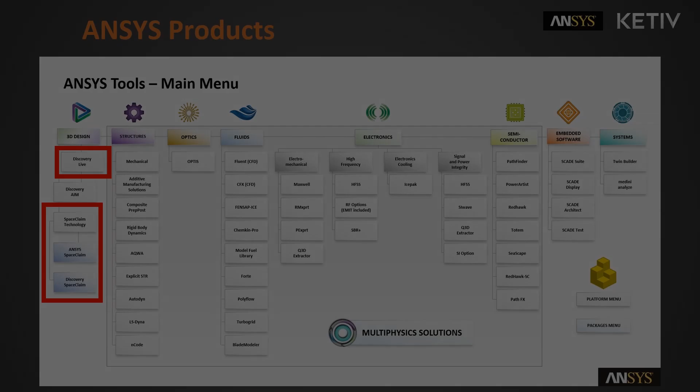So for today, we're going to be going over Discovery Live, but we just wanted to show you a preview of the Ansys products that we offer. You can see that Ansys can simulate different types of multi-physics: structures, optics, fluids, electronics, semiconductors. In the red box, you can see that's the only part of the software packages we'll be going over today. But there's a lot more to Ansys, and if you're interested, please contact us after the webinar.

And we're willing to offer those demos 7 a.m. to 7 p.m., 7 days a week, right? I don't think so. I don't think that was in our contract when we negotiated. All right, well, pretty much all the time, Monday through Friday.

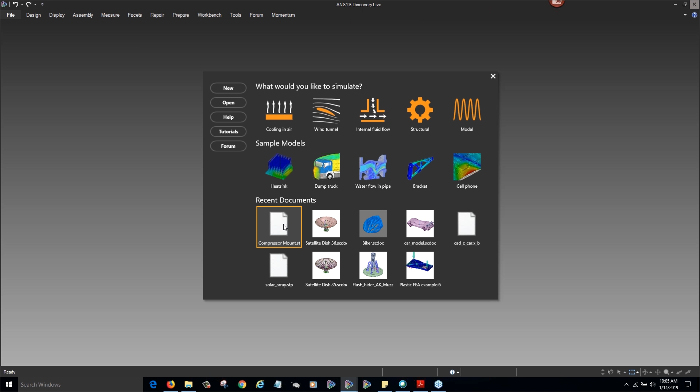So if you have a tool already where you could create your own geometry, or where the geometry is already created, great. If not, you can also use Discovery's SpaceClaim engine to do the design. And that's what I wanted to show you today.

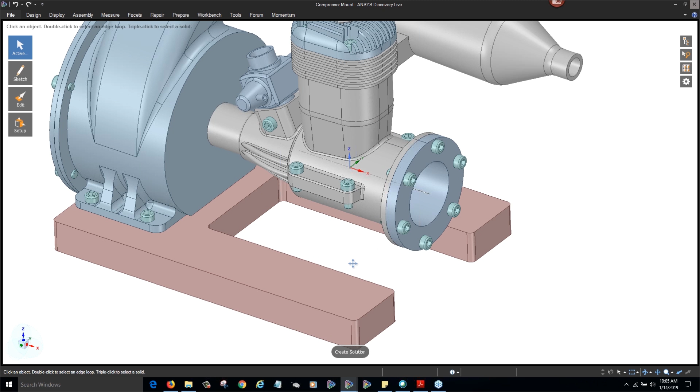So what I have here is just a simple little compressor, sitting on a little bracket there. And I'm a design engineer, and one of the things I notice is that there's a lot of vibration with this motor, and it's causing a lot of stress in this area. One of the things I wanted to do was see if I could come up with some sort of mount design that would help support it and reduce some of that stress, and also let it vibrate to a certain extent, without damaging the other structural components.

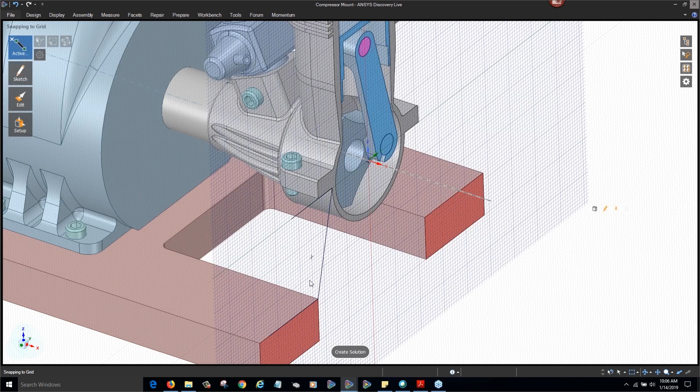So let me just jump right into it. I'm going to go ahead and start designing something. The cool thing about Discovery is that you don't necessarily have to have a completed design here. What if you just wanted to compare a couple different ideas that you had and narrow them down to maybe one or two, and then move on to some detailed design? You just wanted to maybe have something.

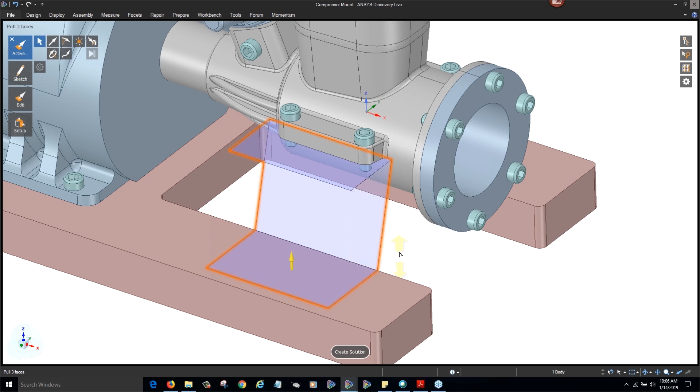Testing, hello. Yeah, you just wanted to mock something up, have something designed, maybe just to communicate it with somebody on your team. Hey, what do you guys think about a design that looks something like this, for example? So here, what I've done is just started with a very simple design here, and my goal is to have the software guide me through what additional improvements I can make to maximize the performance of this bracket. So I've pretty much done a simple sketch, turned this into 3D, and below it has an icon that says Create Solution.

So it's really easy to even go from design to simulation here, just in the same interface. I can come in here and choose between, for example, thermal, fluids, structural, modal. And then as soon as I pick one of those, there's all different types of materials I can choose, or I can add my own.

And then I could select entire assemblies, or select only individual sub-assemblies or individual parts. It's up to me, depends on what I want to simulate. So here, what I'm going to just do is choose the bracket.

I'm going to apply some boundary conditions, like underneath this bracket is where maybe it might be mounted or glued or fixed somehow, so I'm just going to say that it's fixed. When I click on a face, there's a lot of different boundary conditions I can set: forces, pressures, moments, displacements, things like that. So I'm going to say fix support here.

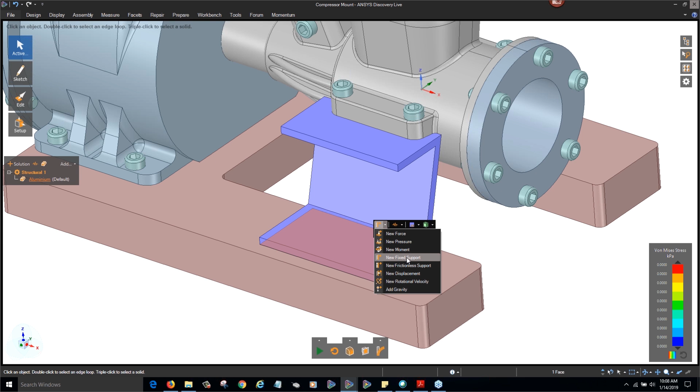And then on this face here, maybe what I'm going to do is apply a force, or maybe even a moment. I think a moment might be one of the things I want to look at first. You can look at multiple things, and have multiple solutions in this same environment. So I'm going to say maybe a -10 Newton meter moment, that way it's rotating in the other direction there.

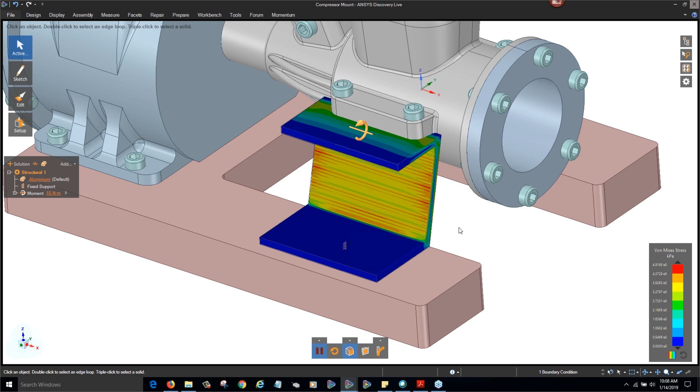As soon as I give it enough information, in this case a fixture and a moment, it immediately starts displaying the results on the simulation.

So if you're a designer and you've always wanted to be able to simulate but have heard it's very difficult, this is a great tool, because this actually makes it very simple for you to do some quick simulations and help validate your designs.

If you're a simulation expert and maybe you also want the ability to experiment with a couple different ideas before you move forward, and you're traditionally used to having a mesher that takes a long time to get results, so experimenting with a bunch of different ideas is not practical, this is a great tool for you too, because this allows you to have all of those very quickly.

I can already see where my stresses are just visually on the model. If I look to the right, there's a legend, showing me the color profile, and it's also displaying that I'm looking at the von Mises stress profile here. Let me introduce you to a little bit of the interface here, and then we'll start really transforming this bracket.

Over here to the left is my solution tree. This is what's going to list my boundary conditions and such. So structural 1, my material is aluminum, I can always change that from here. I've got fixed support, got moment defined there.

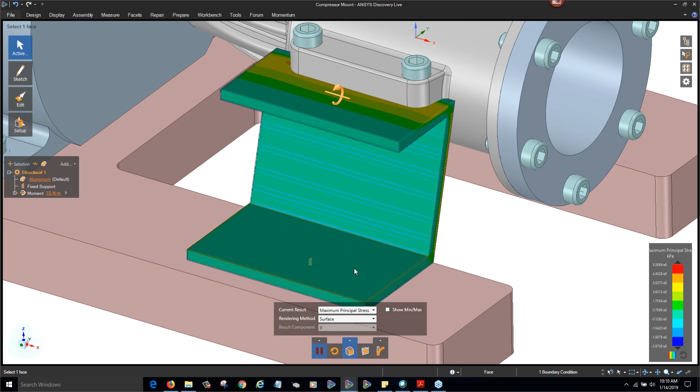Down below here, I've got the ability to pause and play. I can also change the results - right now we're looking at von Mises. If I want to look at deformation, I can easily toggle between those. Normal stresses, shear stresses, for example, very easy to toggle and take a quick look while you're making edits. I'll leave it on von Mises for now.

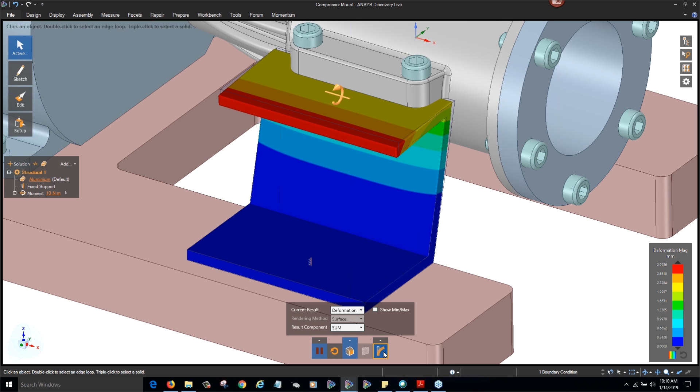And then, one last thing I want to show you is that we can animate the deformation. Sometimes that helps to see an exaggeration of the deformation, so you can get a better idea of how this tool might deform. So enough with that, let me go ahead and start thinking of different ideas.

Actually, before I do that, I figured what would really help me is, besides just looking at colors and the legend, is to actually have some graphs. So I can turn on some graphs, like for example max stress, max deformation, total volume. So as I'm editing the model, I want to instantly see, did that impact help or make it worse? Was it efficient or inefficient? The change that I made, did it add more weight to the actual part?

Is it going to be based on the material that I'm going to use? Is it going to cost too much to make? Do I need to now do some light weighting and things like that? So I'm just going to display these graphs here.

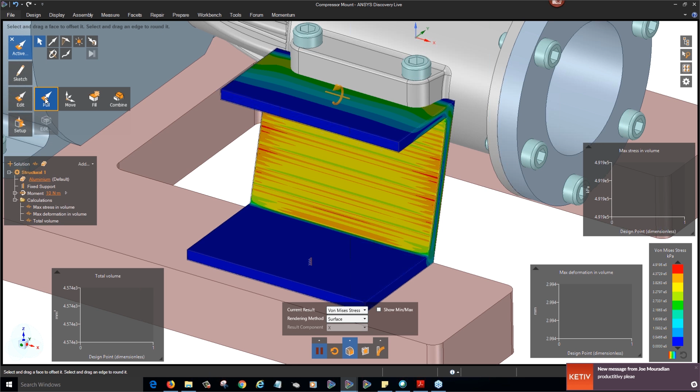And as I start editing the model, we'll take a look and see what displays there. So I'll start with our first easy to use tool, and maybe some of the ideas might be something simple like, can I just add some fillets in here? Will that reduce the deformation or stress to an allowable amount, for example?

So here I went ahead and added fillets, and we'll go ahead and see that display here in just a moment. If you look at my graphs here, it instantly updated that. So you have design point 1, which is before the fillets, design point 2, which is after, and you can kind of see that display.

If I want to change ideas, maybe what I want to do is try doing a chamfer instead of a fillet. How does that affect the overall part there and the performance? So chamfer looks like it has a little bit higher stress than the fillet, and I suspect that's because of the sharp corners, but it's also managing the deformation well, and obviously I'm increasing the volume.

So this is the kind of stuff that I may be interested in early on, without investing too much time in some heavy validation simulation, which is going to take hours just to report back whether something like this is going to be beneficial or not.

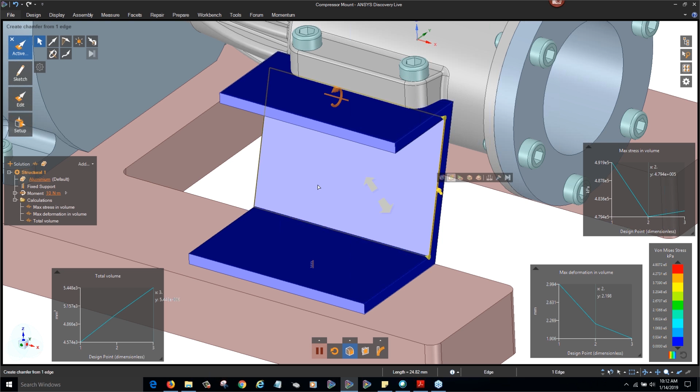Let me go ahead and remove these and then just go in a different direction. Maybe what I want to do is take a look at whether adding ribs would help here. So I'll use the same tool that I use to turn this sketch into a surface and turn it into 3D. I'm using it to copy edges.

It's called the pull tool, so really easy to use. If you have another primary CAD tool that you use and you have the feeling that if you want to use a different tool, it's going to take a long time to learn, because of learning where all the buttons are and where all these things are located, with one tool called pull, I can do a lot of different things, helping minimize that learning curve.

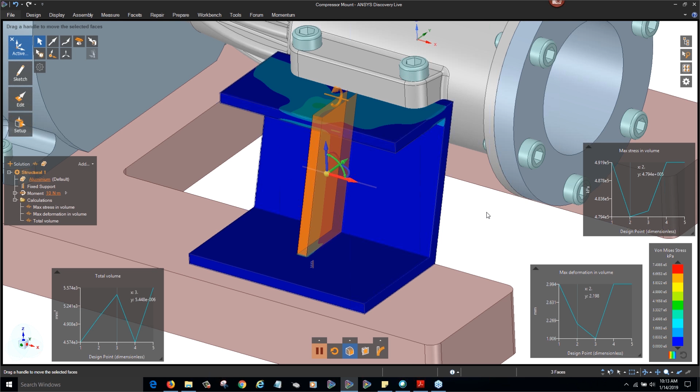So I've got the ribs selected. Actually, I'll probably leave it right there in the center, and again, just kind of animate deformation and learn a little bit more about how that rib is impacting the performance of this.

So the rib looks to be like it's supporting that center part. I see a little bit of deformation on the sides, but if you look at the graphs, it's really telling here, right? Deformation is really improving, but it's still not handling the stress well.

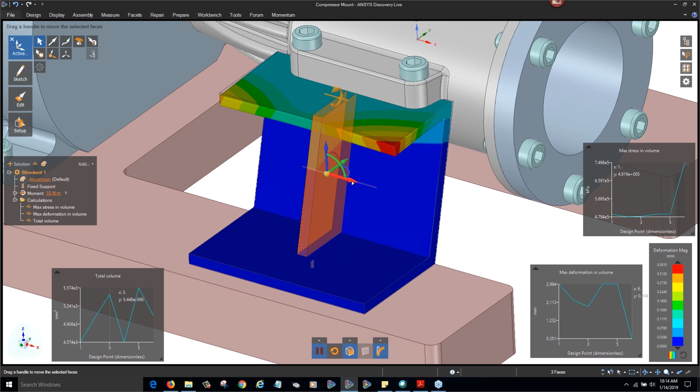So maybe what I need to do is just think about adding more of these ribs. If it's kind of helping out in one area, maybe I could add more to this. So let me go ahead and move this one to the left. That's the cool thing too, is I started with it in the center, but I want to move it. I can just use a simple tool called move to move it.

If you think about also traditionally today, you probably have to go back into some sort of a sketch environment, edit that initial sketch, reposition where it's located, have the model update. There's a lot more steps involved, whereas here it's something that looks to be like a lot of steps are compacted.

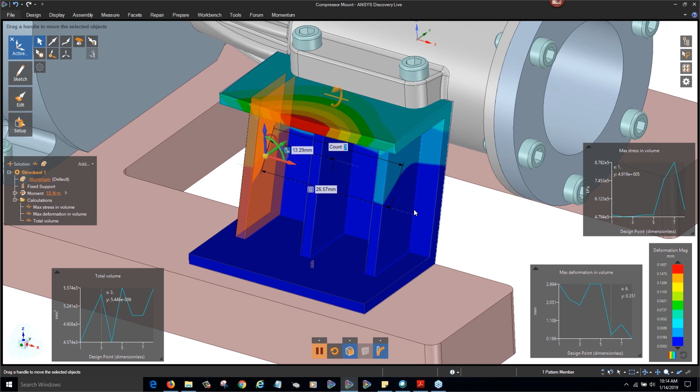So here I went ahead and patterned the ribs using, again, the move tool. Very easy to do. I've got a count of 3. And again, I'm taking a look at, while everything's turned on, the simulation's running, the deformation is animating, and I'm starting to see that maybe this rib design is really going to be something that I want to focus on.

So simply adding fillets or chamfers isn't going to be enough, and maybe a combination of both. Maybe after I put these ribs in, I'll come back and add some fillets or chamfers to the inside to help out. So that's just a quick setup there.

But what if I'm thinking, what do I do? 2 ribs, 3 ribs, 4? Which is going to be better? How thick do these ribs have to be? So the cool thing about this also is I can incorporate parameterization.

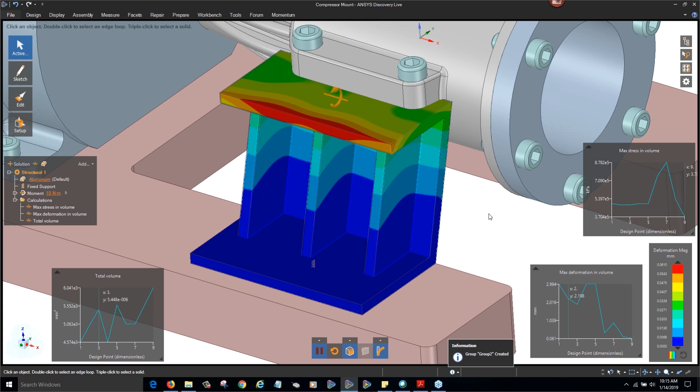So I can have the tool help and guide me quickly, kind of bounce through all of those scenarios and help me make that decision a lot quicker.

So let me go ahead and just see if I could parameterize here the thickness of this rib. Let's go ahead and place it on the backside here. Let's go ahead and parameterize that.

Okay, cool. So now over here back in the solution tree, I've got the ability to add a parameter study. Okay, so let's see how that's done.

We're going to go ahead and bring up those driving dimensions that I created. Like, for example, the count right now, I didn't really customize the name, so I just left it at the default name, group 2. But we'll start with 3 ribs. Maybe we'll go to 5 ribs, and we want it to be done in, let's say, 4 steps or so. So we'll go ahead and add that.

And then we'll also maybe look at the thickness of the rib. Maybe we want to go from like a 1.5 to maybe a 3, and we want to do that in maybe 4 steps. So I'll go ahead and add those scenarios.

What if I want to do all permutations? What if I want to mix and match some of these things? I can also do that. And you can see I'm going to quickly run through 16 design points here, in a fairly rapid amount of time. It's going to display all these values for me and help me quickly see that.

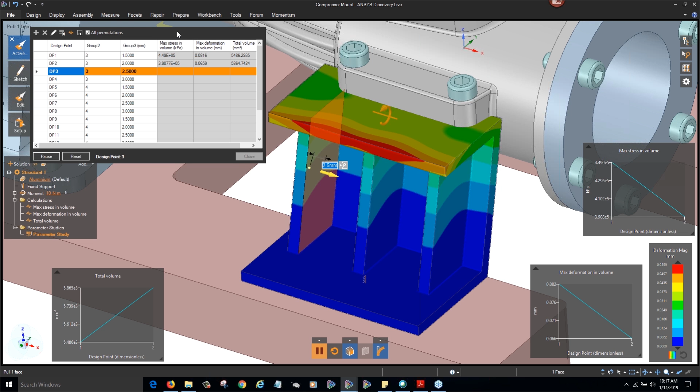So let's go ahead and start that. And I love that it's also going to update the model in real time right in front of me. It's just really impactful as a design engineer, somebody who's maybe not a simulation expert, but just wants to improve their design ahead of time prior to sending it downstream to either a simulation expert or to do that final validation and testing in a more mesh-based simulation tool.

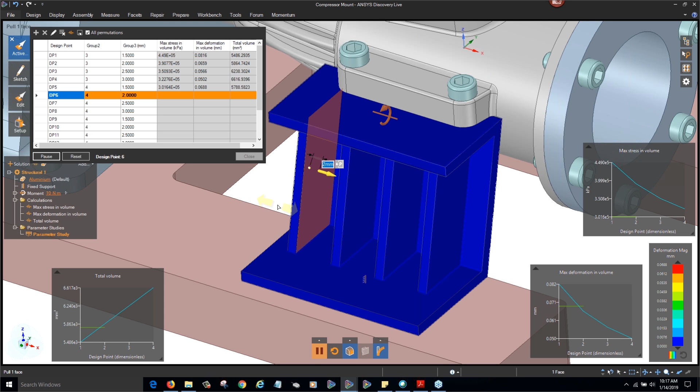So here you can see as these things are kind of going along, the values are being populated, geometry is being updated, and we'll just kind of sit here and give it a second or two to finish. Then we'll be able to pick either by looking at this chart, or I'll show you a graph, and it'll do a Pareto Front where you can take a look at somewhere in the center, something that is the best of both worlds. Or in this case, all three worlds, right? That minimizes stress, deformation, and keeps the volume pretty manageable.

Now take a look at my graphs too. Notice how there's new colors being introduced. So as these different groups are being calculated, it's also superimposing these graphs. So I can look at these trends and not have to toggle back and forth between them. I can just look at them kind of all at the same time.

So let me talk a little bit about the technology here real quick while we are still waiting on the next 5 design points. This is running completely off my GPU, so I don't have a mesh set up here. I didn't have to spend time dialing that in. I'm literally leveraging how much GPU horsepower I have. So based on how much available RAM, it's going to basically discretize this model, break it up into, for example, voxels, and treat it that way.

Now, if I wanted to maximize the usage of my GPU, above the pause button there is the ability to move this slider. So I can have higher fidelity, more accurate results, but it's also going to use more of my GPU horsepower. So it's definitely advantageous to have a beefy GPU. That way you can get the most accurate and most precise calculations in here, and then take that and move it forward through the simulation workflow.

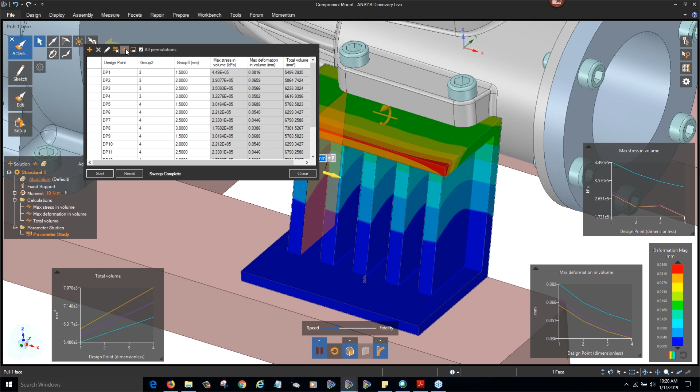So my parameter study is done. I'm going to click on this chart button, and you can see I've got a Pareto Front that could be displayed here depending on what I want to see. For example, if deformation and volume are important, I want to find a design with the least volume and the most acceptable deformation. So I'm thinking somewhere right in this area here - design point 10 or design point 3.

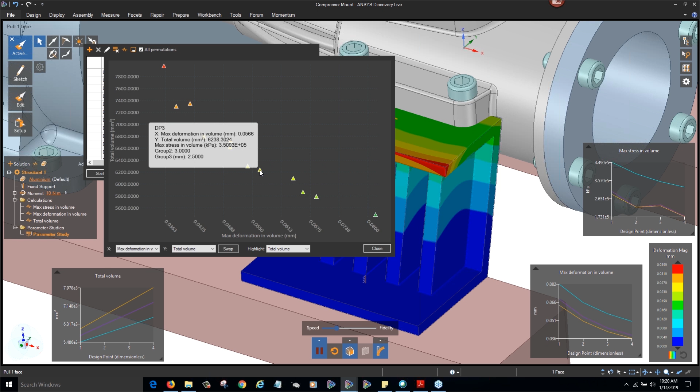I'll go ahead and just click on design point 3. And what you're going to see is the model is going to update to that design point, and it's going to have that one there for me.

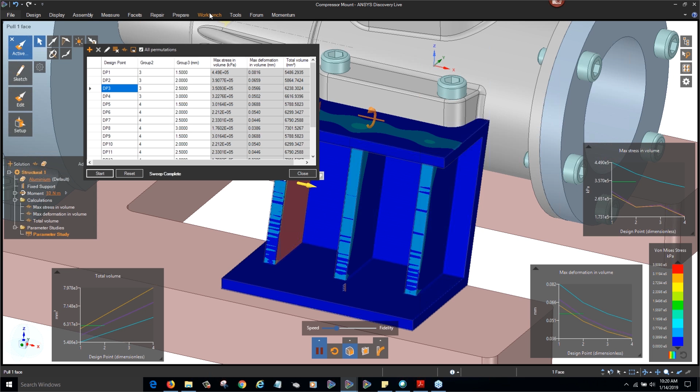Let's say that's the one that I want to choose, the one I want to move forward with. It's just a file save as, or I could port this over to our next simulation tool just by clicking up here in the Workbench tab, so I can send it on and do a more sophisticated simulation. I can also export these results out in a table if I want to document and keep these saved. So that's very easy for me to do as well.

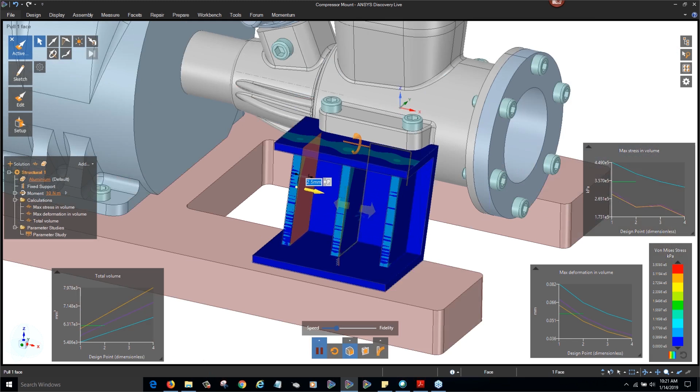In the interest of time, before I pass it along, I want to give you another thing to imagine. So far we did this with aluminum, but maybe you're experimenting with rapid prototyping, and your simulation tool can't handle faceted data. I want to show you that we can run these same simulations looking at faceted data like STLs, for example, and still have it be as easy as this.

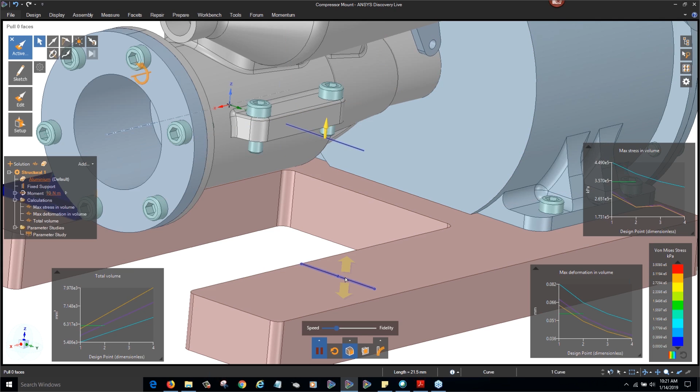So I'm going to do something similar here, but my bracket's going to be based on something that I would 3D print. Let me thicken this guy a little bit here, and then thicken this guy here too. I'm going to use our lofting tool to have it create something organic, something like that - very simple.

But I want to go ahead and start a new simulation. Now if you think about this, you're probably closing this off, opening up another project, starting up again, importing the model, whereas here I can just say add a new solution. This time I want to do maybe again structural, and I can choose any other type of study that I want, but I'll do structural - this time maybe it's plastic, some sort of ABS plastic that's going to be printed by my 3D printer, and I want to take a look at that.

So right away, I have a new structural simulation in my tree, and I can just start applying those boundary conditions again the same way. Actually, before I even do that, let me do something even more fascinating, and that's to add lattice structuring in here.

So it's going to be 3D printed, and I want to be able to lightweight it. So I want to have some internal honeycomb or lattice structure get created. That's all available within here, within this design engine.

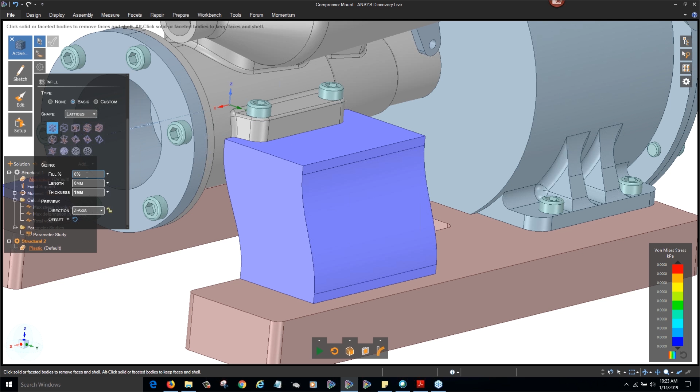Let me make sure those are set for 1 millimeter thickness, and I want something like maybe a 40% fill density on this particular model. I'll choose some faces to remove so you can see the inside, so you can see how cool these lattice structures could look.

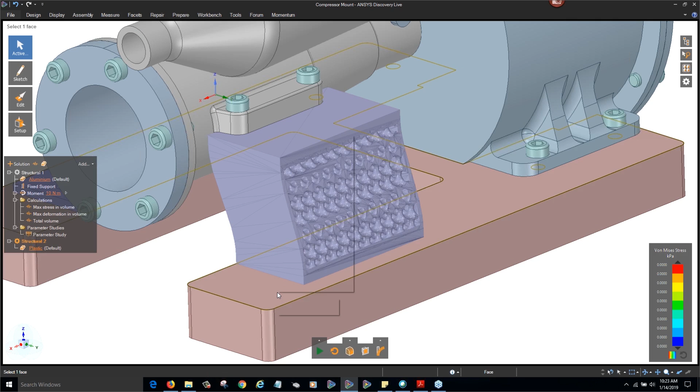But before I even run the simulation, I want to really see if it's going to work. Before I go and produce the one to the left, I just want to see if we could achieve similar performance with the model on the right, being that it's going to be 3D printed, for example.

So I'll set the same boundary conditions - fixed support on that guy there. Up here, we've got a moment being applied. Maybe I'm going to use that edge as a reference, then I'll enter in that moment value. And you're going to see the simulation instantly start running on this.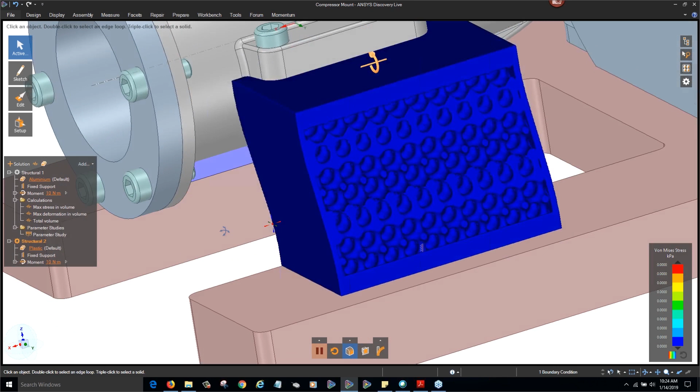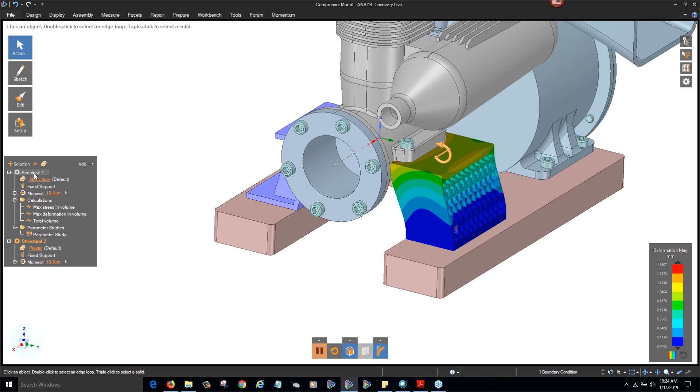This could have thousands and thousands of facets—it's an STL. But we're still able to simulate on it and see where we may have some stresses, and also animate the deformation to help us understand its behavior, and set up graphs and things like that. So we're not just limited to BREP models; you can also do these faceted mesh-based STL models, and simulate those, and easily toggle back and forth if you're trying to tell a story. So that's all I wanted to show you there.

Let me show you where you can find some learning information. Discoveryforum.ansys.com is our community forum, where you can come to see tutorials, application examples, how-tos, hardware requirements, as well as other articles and knowledge-based things. There's a lot of great areas here that will allow you to really take advantage of Discovery, learn from your peers, and communicate with the development and support teams.

I did mention that we run on those very sophisticated NVIDIA Quadro GPUs. Let me see where that might be located—off the top of my head, I forgot. Here, installation resources, hardware requirements. There we go. You'll be able to see NVIDIA Quadro with K-class, M-class, or P-class architectures, at least 4 gigs or better, with 8 gigs preferred.

There's also this compatibility utility, so if you don't know yet whether you've got a Quadro, or if your drivers are up to date, or maybe you've got a different type of NVIDIA GPU with a lot of RAM and want to see if it's compatible, feel free to try to run this. And if you don't have hardware but want to evaluate it up front before making that investment, there's also this online cloud-based trial. You can run a version of Discovery through the cloud, on one of our servers—upload your geometry, run your simulations, and see if the tool will benefit you before purchasing any hardware.

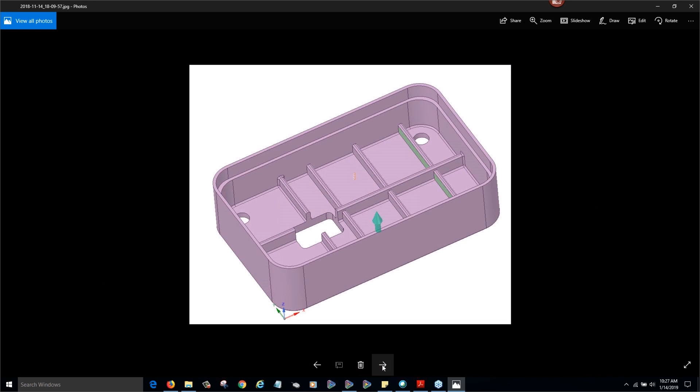I think there may even be some images I wanted to show you here. This is an example of what you'll see—the course material, how it's broken up for live sessions, and you can just start the course there. And then at the end, it gives you a quiz, which is really nice. I love that it quizzes me, because that's really helpful to make sure I've captured the knowledge.

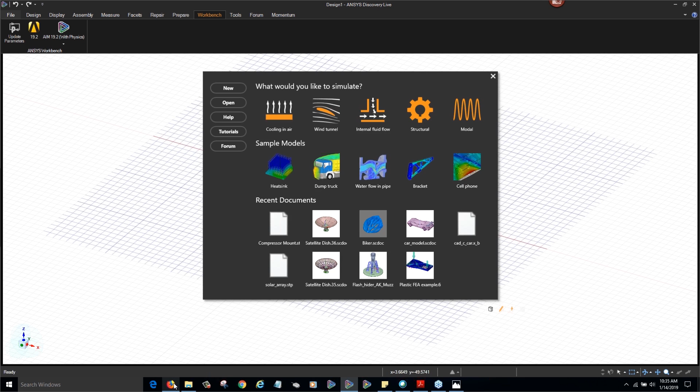Can you show the other products, JD? Sure. We want to show that whatever you've seen today, Discovery Live is a great tool, primarily for design engineers. But we've probably just shown a small percentage of the tools available. I want to show you a quick shot. If you look to the far left side, where it says 3D design, we showed you a small portion of Discovery Live. Look at the rest of the products available.

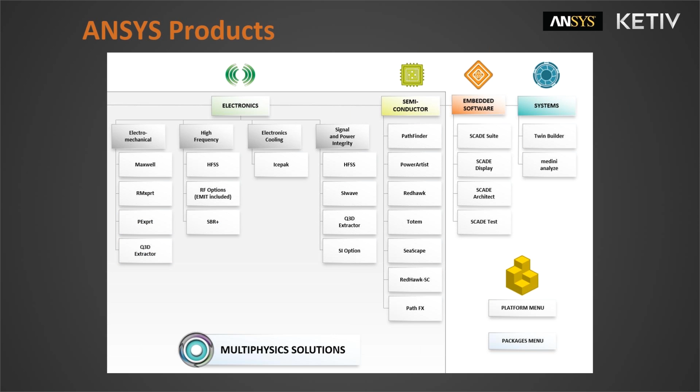That's important, especially if you're an analyst or engineer wondering, can we do CFD? Can we do mechanical? Can we do computing? Can we do electronics? It's all broken down there, and I want to make sure everybody is clear on that.

One additional thing, if you don't mind me mentioning on that slide: traditionally Ansys has been known as the simulation, multi-physics simulation leader. You're probably thinking it's always been an expert simulation tool. But we've seen the benefits of empowering designers early on, giving them the ability to dabble a little in simulation. We've seen the impact of that, and how much higher quality geometry comes through the door when you're ready to run some of these higher-level simulations.

So Ansys is doing something new with Discovery, opening it up to more non-simulation experts, while maintaining our reputation for powerful and accurate simulation tools. We hope to continue empowering all KETIV users out there, giving you more tool sets to get higher quality jobs out the door. Thank you for letting me say that real quick.